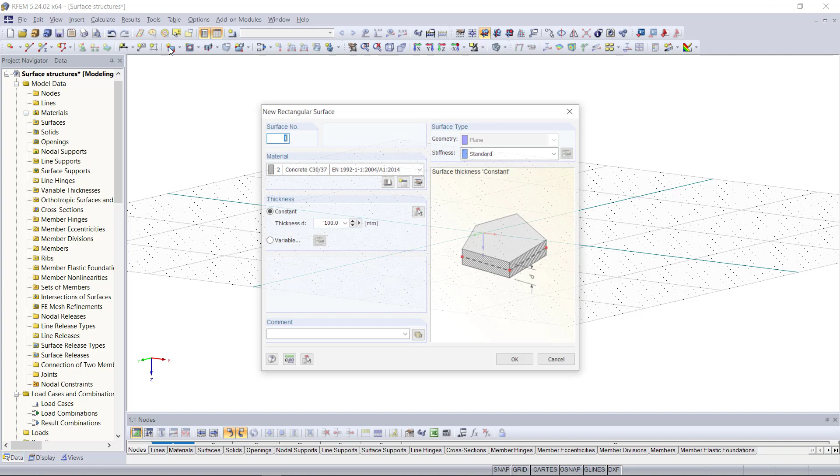For that, we can find in the toolbar a symbol called new rectangular surface. By clicking on it, a new dialog will appear where we can define the properties like material, the thickness, and the surface type. As material, we will choose, for instance, concrete C30/37 based on a European standard, and the thickness will be, let's say, 300 millimeters.

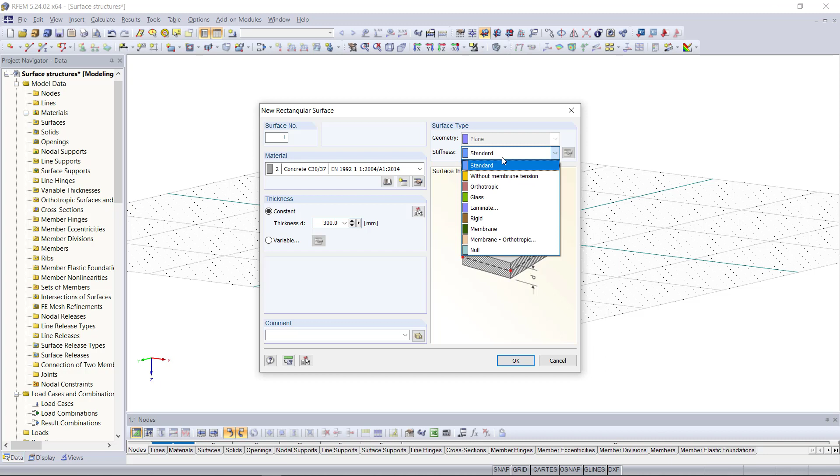And then under surface type, we can choose some additional options regarding the stiffness and with that structural behavior of the surface. We can choose, for instance, without membrane tension, or we can choose a rigid one. But for our example, we don't need that, so we will stay with the standard type.

With clicking OK, we can select 2 points in the graphical area to create the surface. Up here, we can change the view to the top view. This makes it just a little bit easier to snap those points. So the first node will be at 0 and 0, and the second one at 10 and 10.

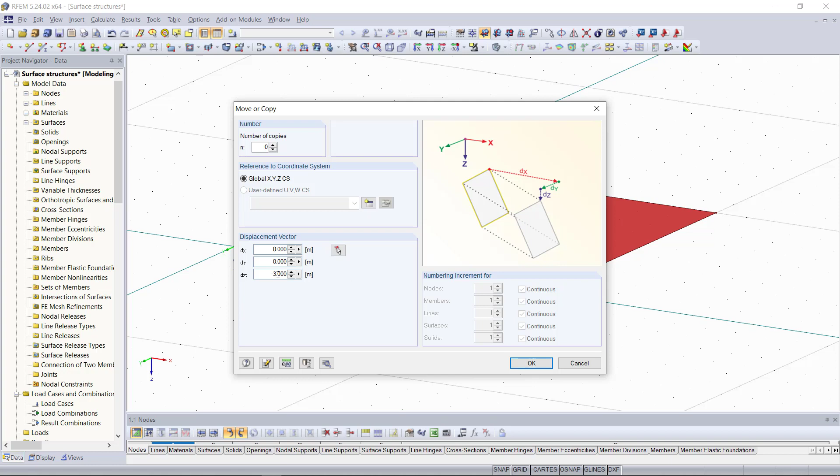Then we will move the surface with an offset of 3 meters along the z-axis. For that, we use again the copy and move command, which we can find in the toolbar, or we can also find that with right click on the surface. Since we don't want to copy this one, we can keep the number of copies as 0. And in order to move it, we just type in the z direction -3 and then click OK.

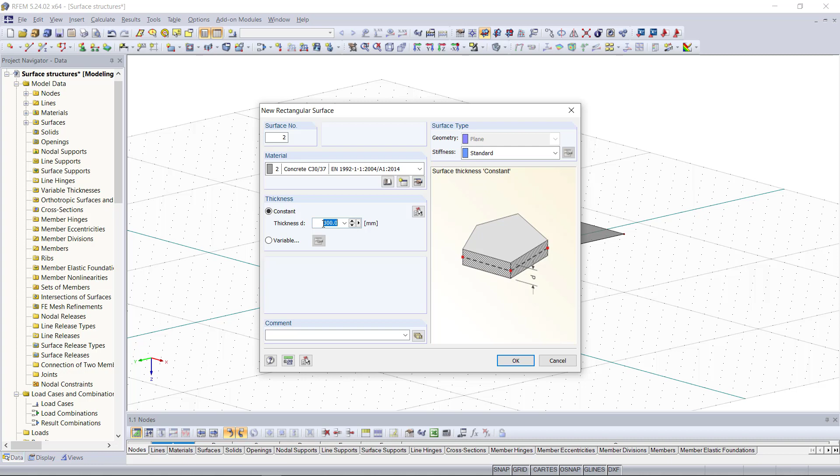Now that we have our slab, we will create 4 more surfaces, which will be our walls. And for that, we click again on new rectangular surface. In the new dialog, we can keep the previous settings except the thickness. Our walls will have a thickness of 200 millimeters, and then we can graphically insert them along the edges of the slab. A great help during modeling these surfaces is if we change up here the plane, we can easily snap those points and create those surfaces.

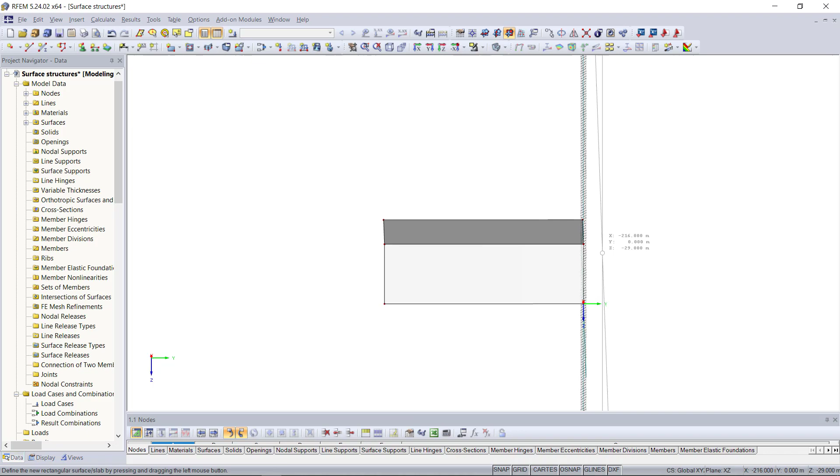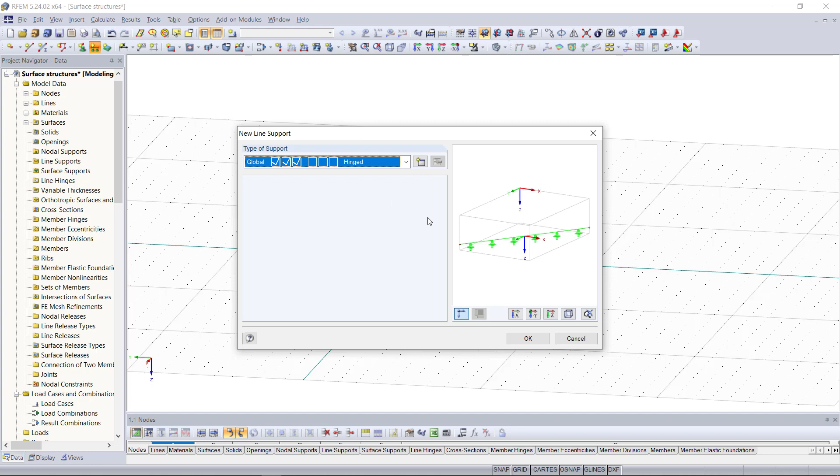Now that we have our structure, we need also some supports. And for surfaces like walls, in order to create the supports along their edges or along the bottom lines, we can find up here the symbol called line support. And we will choose hinged ones, and then with clicking OK, we can assign these very quickly to those lines.

You might notice that there is no thickness displayed for the surfaces that we've just created, although we've entered a thickness back in the surface dialog. So this is just a view setting. We can get it displayed if we go to the display menu and then choose rendering. Under model, here we can choose filled inclusive thickness. Just as a hint for you, and as we can see it now in the graphical area, the thickness is rendered on these surfaces.

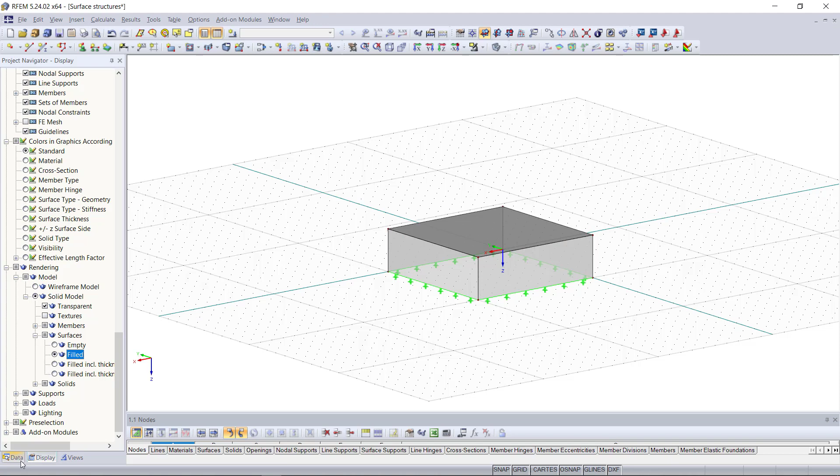So we are almost finished with our structure. Just for more stability, I'd like to create a column in the middle of the slab. For that, we will divide it into 4 identical surfaces so that we can get the middle node for the column. And then later, we can also apply a load on each of these surfaces within 4 different load cases.

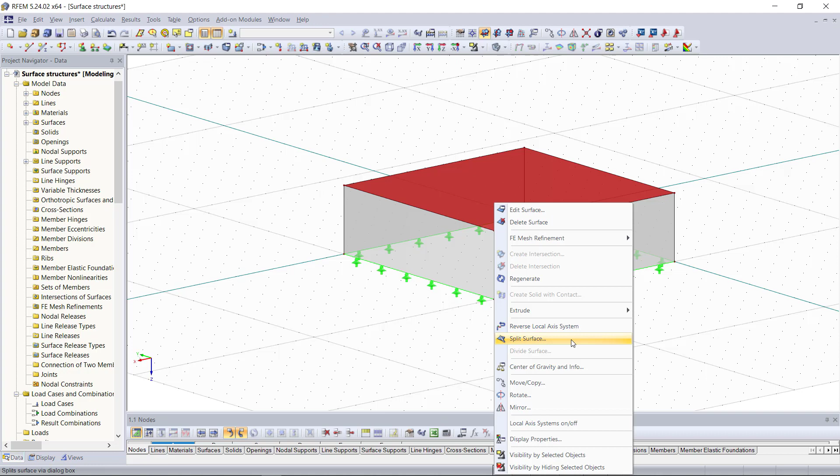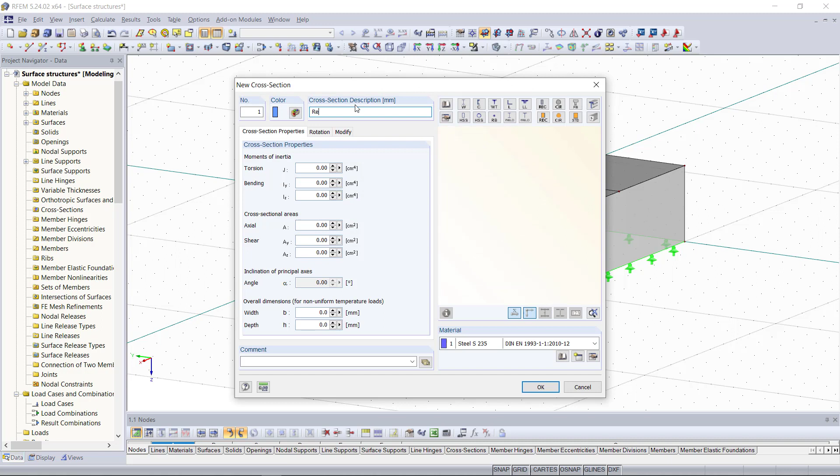And now we can create the column at this middle node of these surfaces. So we will select new single member up here, and then as cross-section, we can enter a rectangle with a height and a width of 300 and concrete as material.

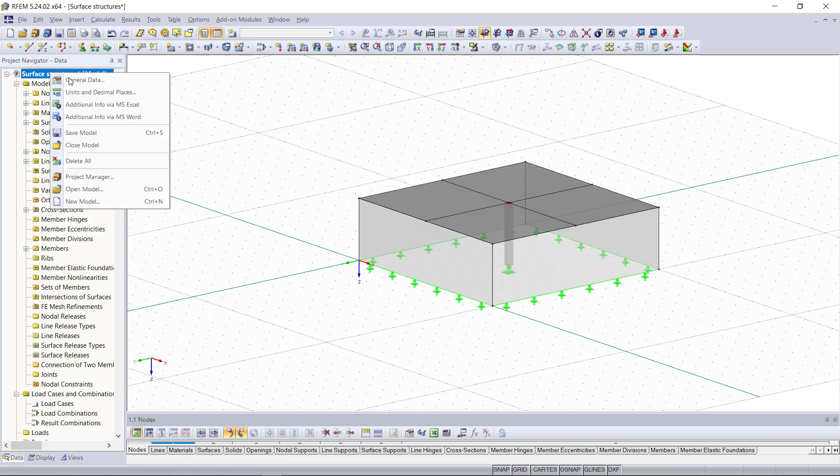And then we will add also a nodal support to this column. Now that we have our structure complete, we will move on to the load cases and loads. Before we get started with defining any load case, we will first go back to the general data. The dialog for that we can open up with right-click and then select general data.

What I want to do here is to activate the option called create combinations automatically. So first we can determine the standard type, for example, the European one and the German national annex for it. And then we can activate this option here. This will allow us that the load combinations of the load cases that we will define later are getting generated automatically, since we have this time a couple of more load cases than usual. And with OK, we can close this dialog and start defining the load cases.

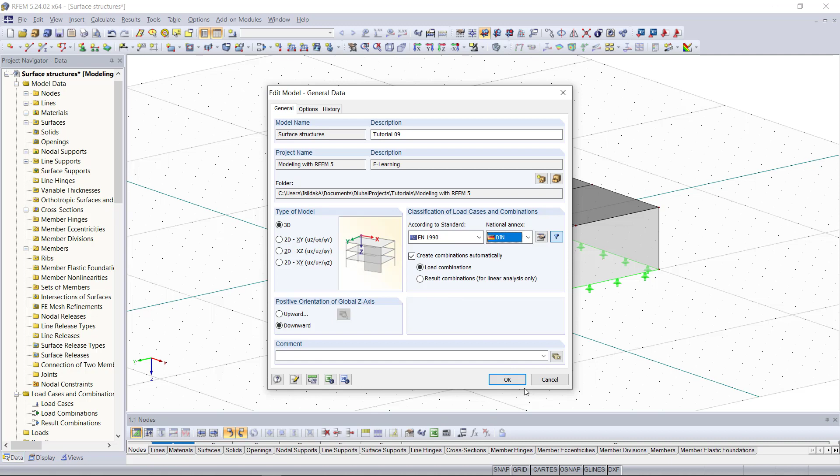So the first load case is, as usual, the self-weight, and then we will create 4 more load cases. Assuming an office building above our slab, we will choose this action category here, and let's say we call this one surface load 1. Then we can copy this one 3 more times and rename them to surface load 2, 3, and 4. And then we can assign a surface load for each load case with changing the surfaces.

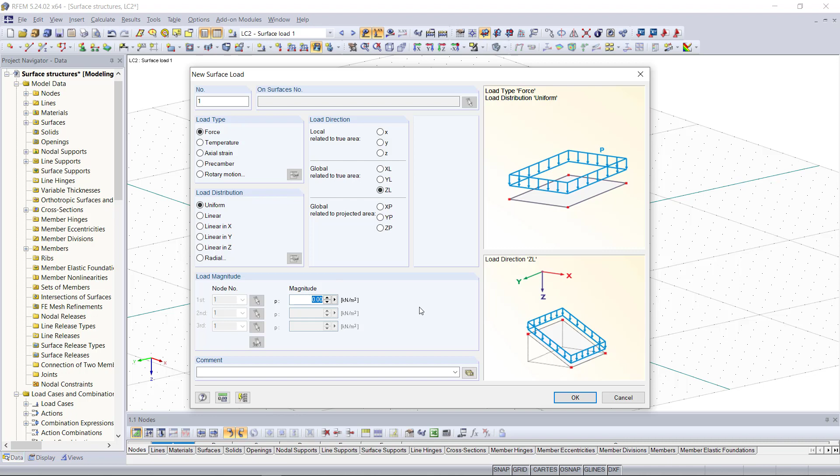So we will choose the right load case up here and then click on this button called New Surface Load. Similar to the dialog for a distributed load, we can keep load type as force, the direction will be global z direction. As a load parameter or magnitude, we will enter here 2.5. And then we can apply it to each surface.

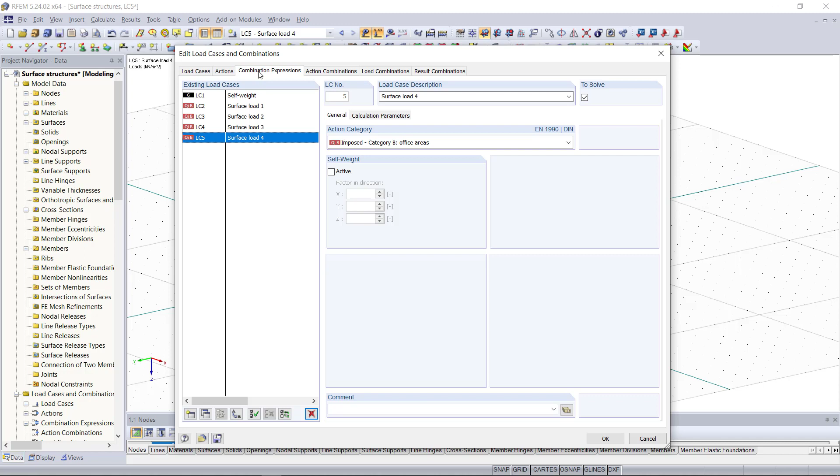With the loads applied, we go once again to the load case settings, and under combination expressions, we can set all possible settings for creating combinations automatically. There is, for example, the option called reducing number of load cases, which can be very useful if you have a couple of more load cases than we do right now. It allows us that the number of combinations is getting reduced to the essential. Otherwise, RFEM would create every possible combination, even if it's not decisive. In our case, since we only have 5 load cases, we don't need to activate this option here.

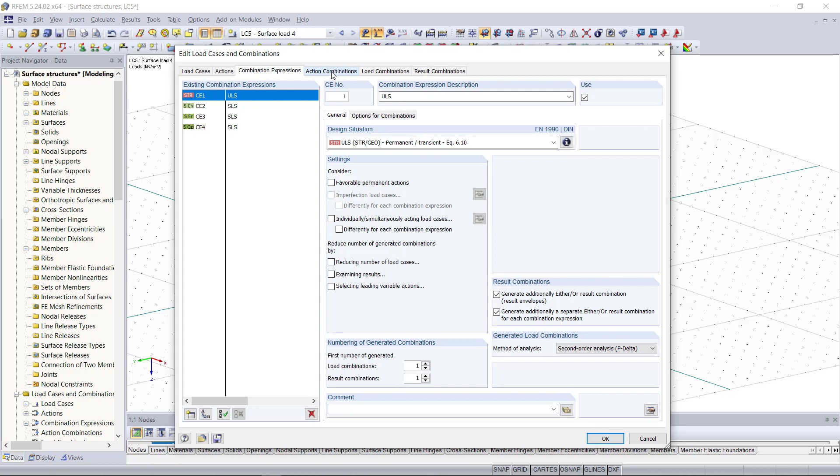Then in the next tab called Action Combinations, we can define and edit the action combinations according to the standard or standard type, including the serviceability limit state and the ultimate limit state. Next, under load combinations, we can see the load combinations, which are generated automatically, and if necessary we can also edit them. Right now, for our example, we have in total 64 different combinations, as we can see here.

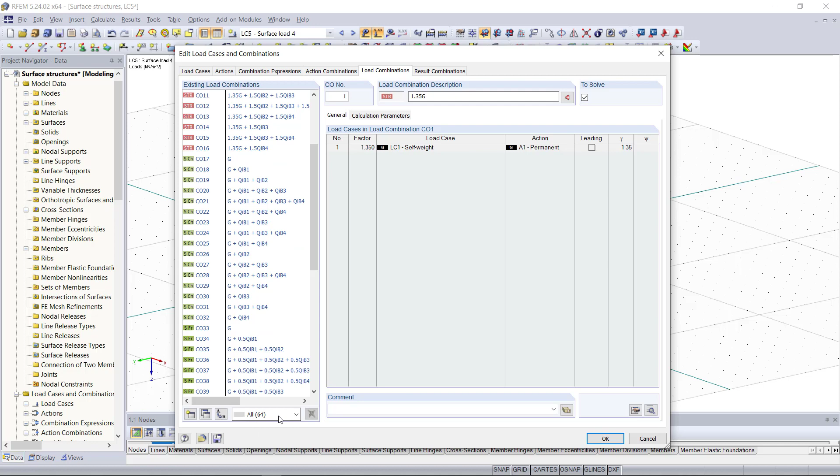And then the last tab is called Result Combinations. A result combination superimposes the results of load cases, load combinations, or result combinations according to the preset combination expressions. If we click OK, we can have a look at all combinations up here and then check if the load cases were combined as we like.

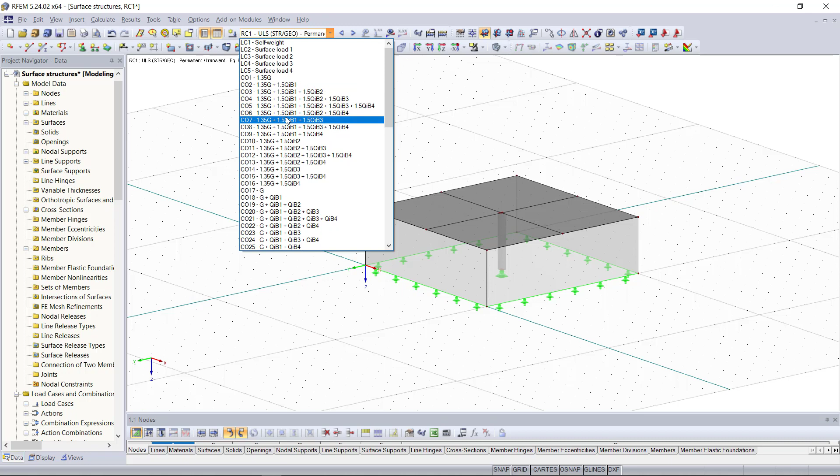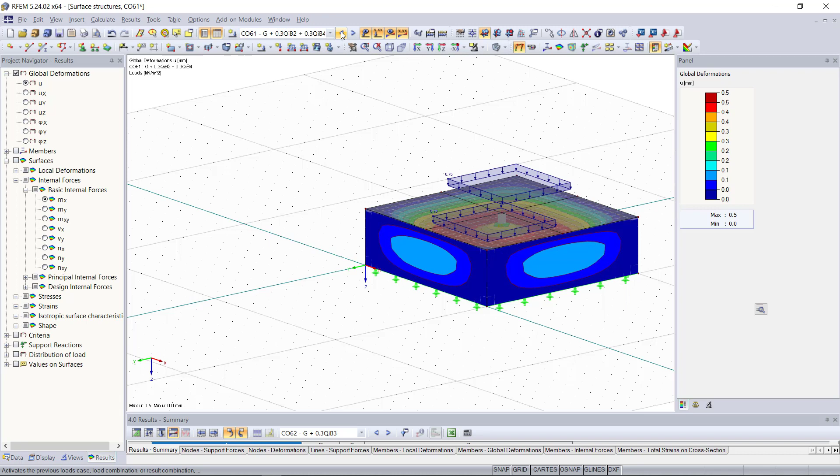And then we can run the calculation for our system. And since we have a couple of more load cases and combinations, this will take just a little bit longer than usual. Now we can display the internal forces and deformations for each combination which we choose up here. So this was our tutorial about modeling and calculating surface structures, and the next video will be about modeling 3D structures.